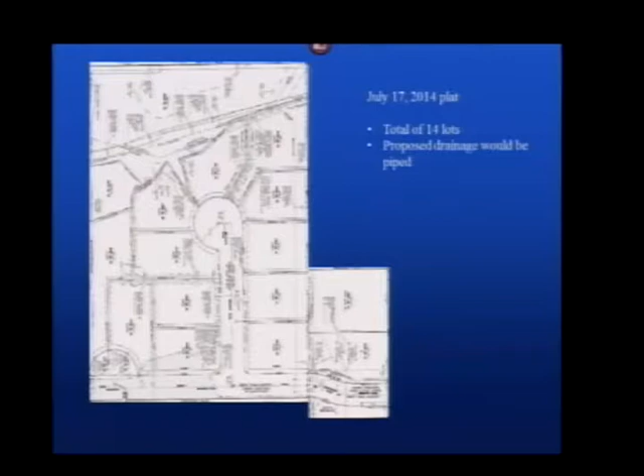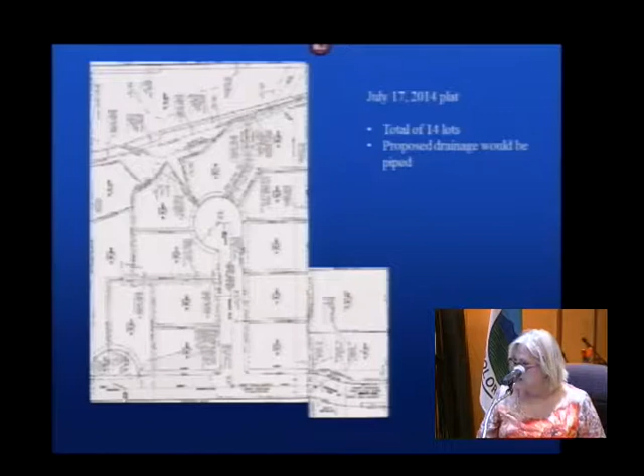This is the graphic portion of the plat that we looked at on July 17th. North is to the top, 33rd Avenue is down here across the south, and Quail Street is over on the eastern side. There were a total of 14 lots, and at that point, the drainage report and plan showed all of the proposed drainage to be piped.

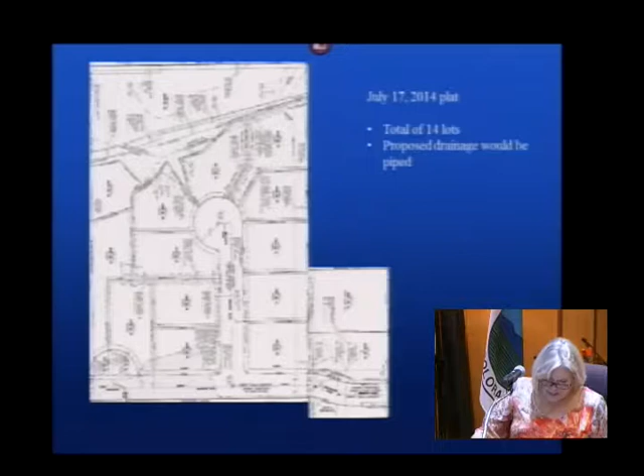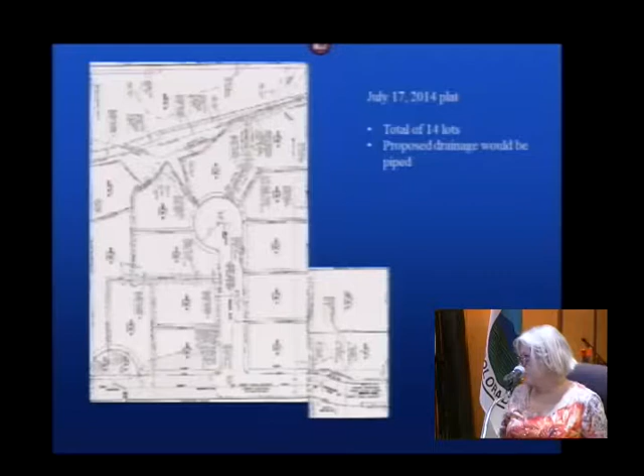The public hearing was continued until tonight, August 21st, and the applicant did receive approval of their nationwide permit on July 25th, which authorizes them to build the project in accordance with the modifications we're talking about tonight. So this is the old plan, and this is the new plan.

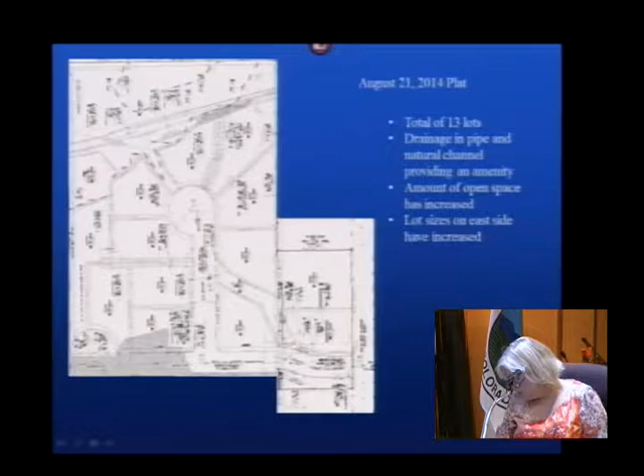Again, north is to the top, 33rd Avenue is down here at the bottom, Quail Street on the eastern perimeter. We still show 33rd coming in and extending west with a cul-de-sac bulb called Quail Court extending north. However, the plat and drainage system has been modified so that stormwater enters the site and runs in an open channel in a tract called Tract G at this location. When it hits the street, it is piped and then daylights again at the north portion of the cul-de-sac and runs into Lena Gulch.

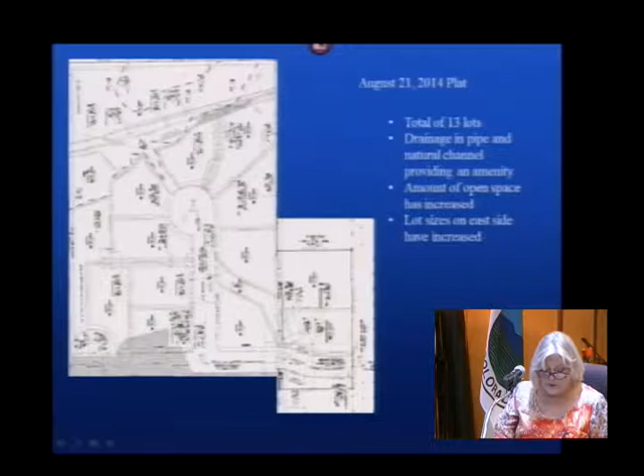Now the minor tributary called Quail Creek, which is part of the drainage situation on the site, still has to be accommodated on the property, so those flows are still going to be piped along the eastern edge of the property in a drainage easement.

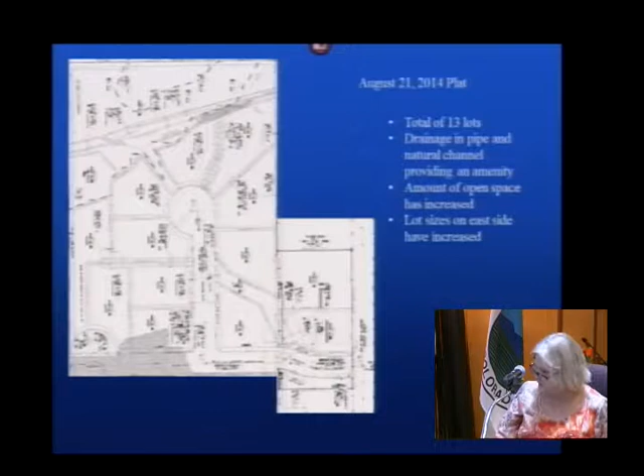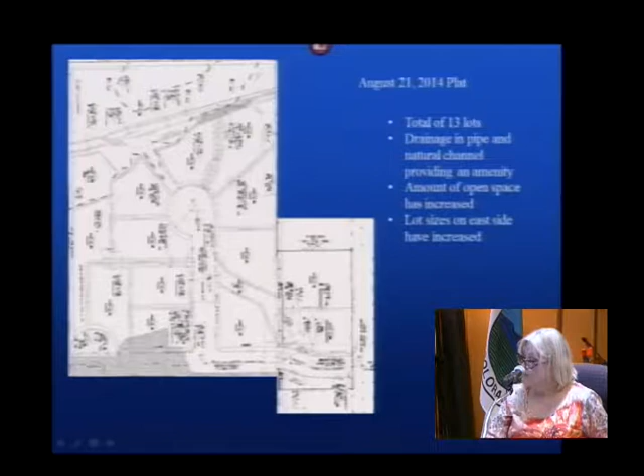The drainage design with the open channel in the southeastern portion affects primarily the lots on the east side of the cul-de-sac called Quail Court, and it actually reduces the number of lots from 6 down to 5. So essentially the first 3 lots, lots 1, 2, and 3, now are lots 1 and 2, with this conveyance that goes through. They've divvied up the property to accommodate that.

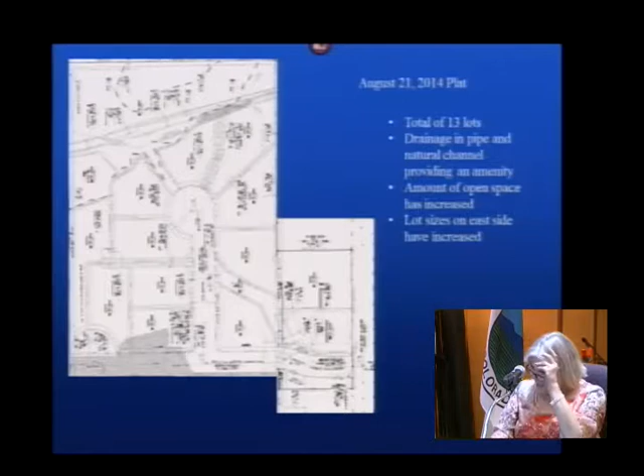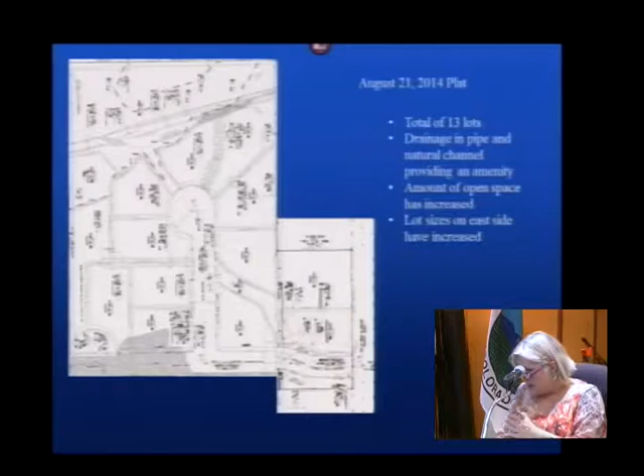The lots on the eastern side of Quail have been reconfigured. The lots on the western side of Quail Court are still the same, and the only difference is that they've been renumbered. So instead of 14 lots in the subdivision, we're now down to 13, and that's the same scenario for the 2 parcels over on Quail Street—same configuration, but also renumbered.

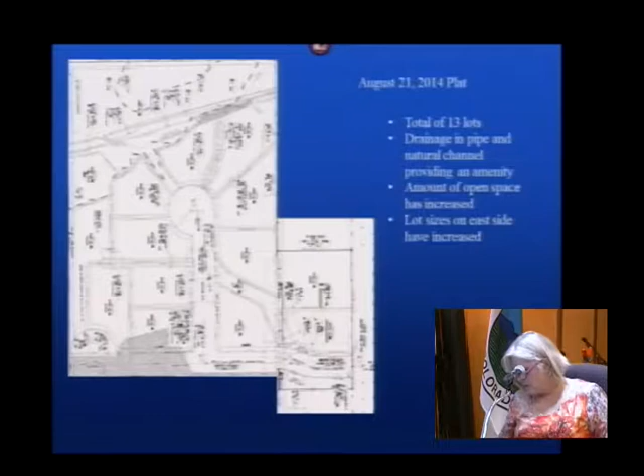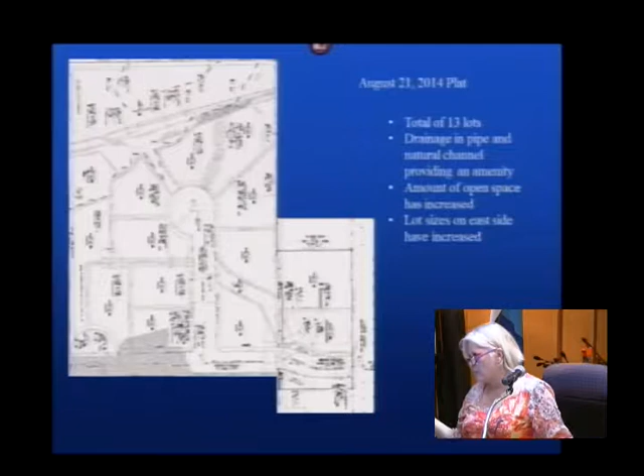Because of the open channel that extends from the cul-de-sac bulb up to the Lena Gulch area, Tract A, the whole floodplain piece with the actual gulch running through it, has increased in size by about 2,000 square feet. So we've got fewer lots, drainage in a pipe and natural channel, which we think will be an amenity for some of the lots. The amount of open space has increased, and the lot sizes on the east side of the subdivision have increased as well.

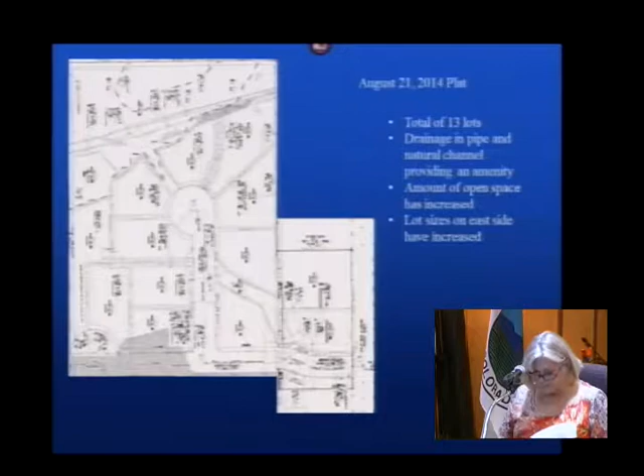There are a couple other items of concern that were brought up at the July 17th meeting. The first is the issue of flag lots. There was a lot of discussion about Lot 11, the westernmost lot, which has a large buildable area and then a long driveway, or pole piece, that connects to 33rd Avenue. We were asked whether alternate designs were considered.

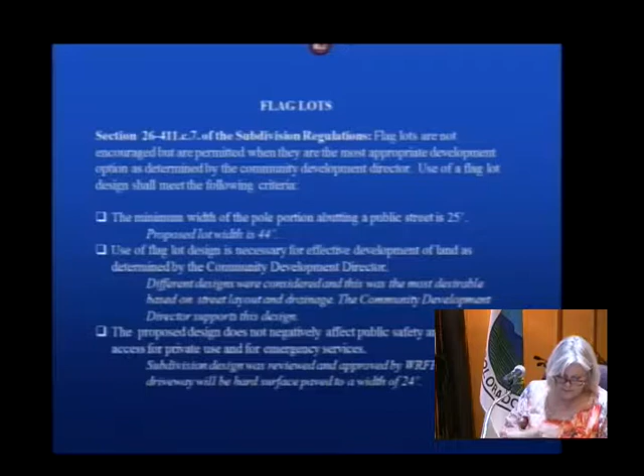Now, we do allow flag lots per the subdivision regulations. They are not always encouraged, but if used, there are 3 criteria. First, the minimum width of the pole portion abutting a public street is 25 feet, and in this case it is 44 feet in width. This figure does not reflect the cul-de-sac bulb—when you include the bulb, it's really more like 80 feet by the time you get the circumference of the bulb.

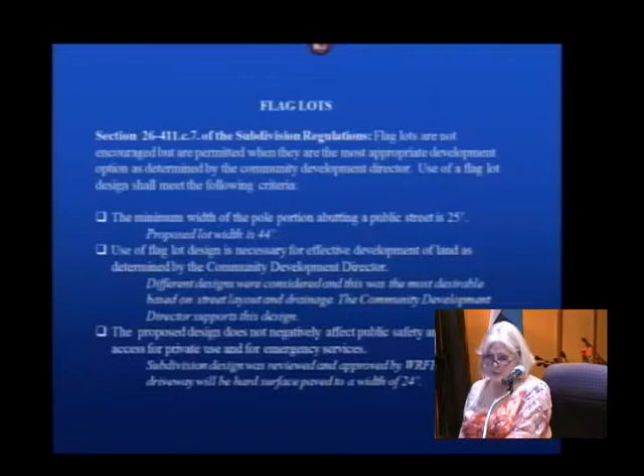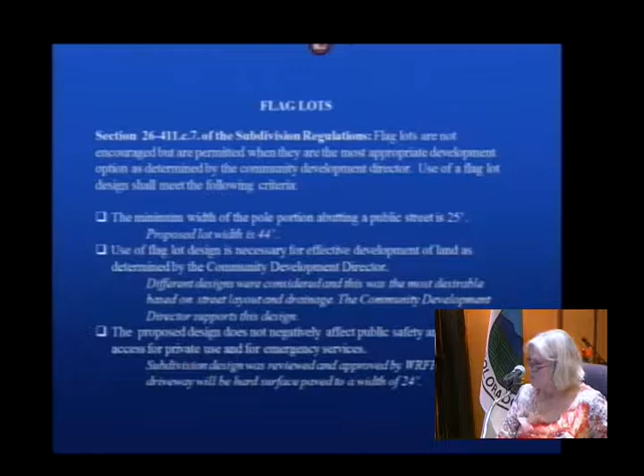The second criterion is that the use of the flag lot design is necessary for the effective development of land. As I indicated at the last hearing, we looked at different designs, and this was the one we considered most desirable based on street layout and drainage, and community development supports this design. Finally, the proposed design does not adversely affect public safety and provides access. The subdivision design was reviewed and approved by the Wheat Ridge Fire Protection District, and the driveway will have to meet standards with at least 24 feet of paving. I would note that Lot 11 is a little different than a lot of the flag lots we see.

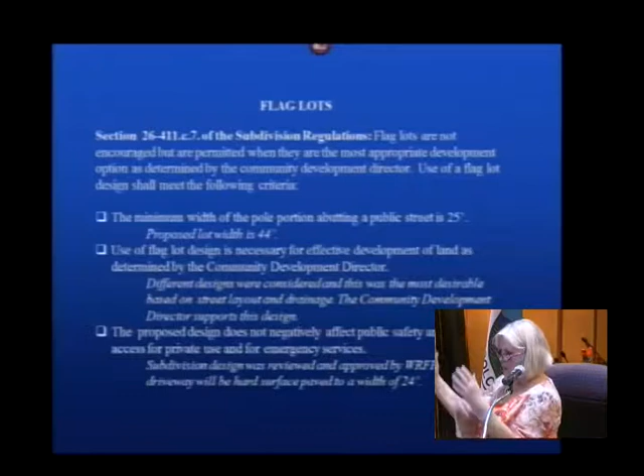A lot of times we see where you've got a piece of property with a house on the end, and then with kind of a big rear yard, and people want to subdivide off that rear piece to provide another dwelling unit site. This is a little bit different because it's specifically been designed, and it does exceed the R1 minimum standards and is over 20,000 square feet in size.

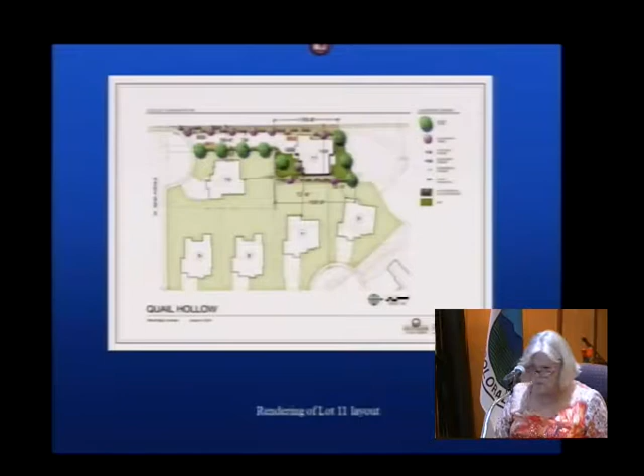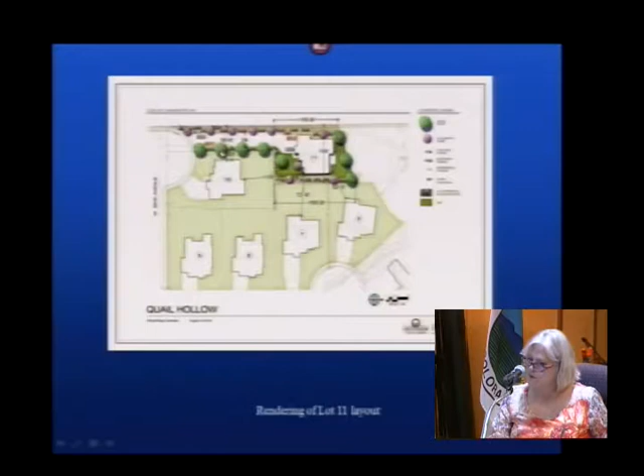The applicant did provide a couple renderings about what they anticipate construction on Lot 11 to look like. In this situation, north is over on the right-hand side. 33rd Avenue comes in with the temporary cul-de-sac bulb, and then the driveway extends north. This lot here, Lot 10, is set back quite a ways from this. I don't think it'll have the feeling of looking directly into their backyard. There's also some pretty nice buffering with this large side yard on Lot 10.

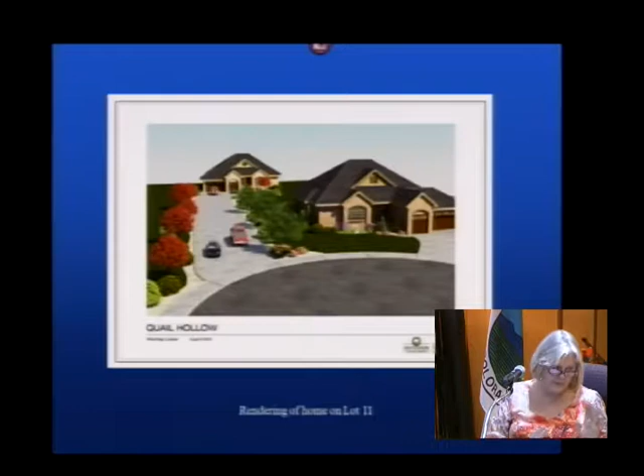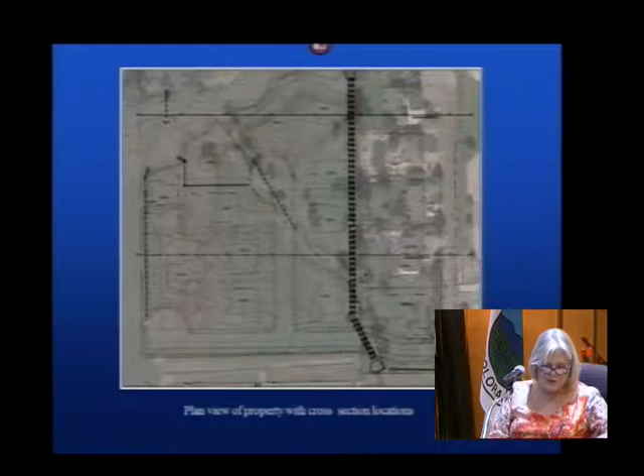So that's what they were thinking the lot layout might look like, and then this would be a rendering. They probably will be able to address that a little bit more about how they think that lot will develop. So the other question that came up with regard to the subdivision design was the issue of fill that was being put on the property.

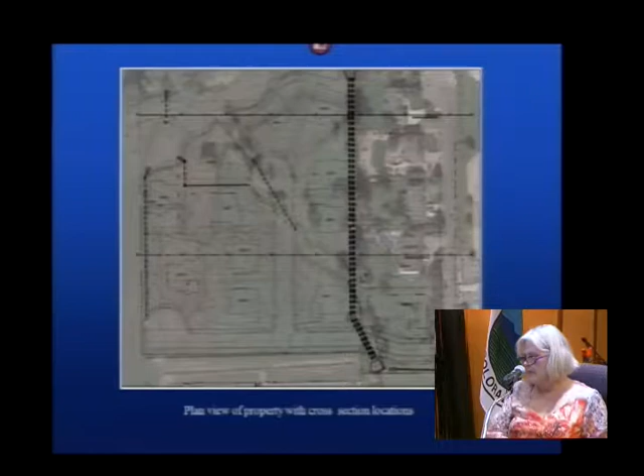The applicant had indicated there would be about 3 to 6 feet, depending on the location, less fill dirt down at the southwest corner and more up at the northwest corner.

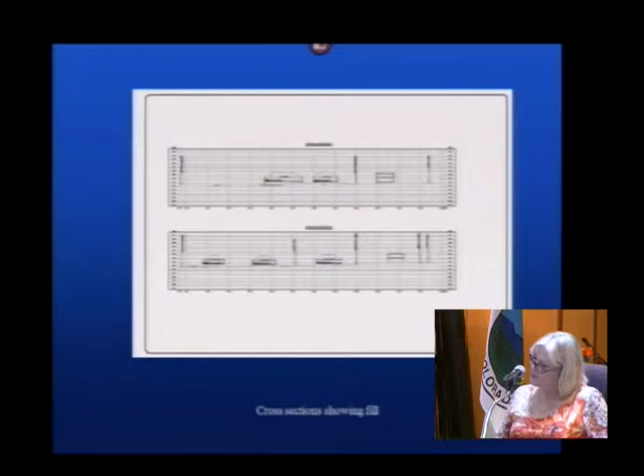So this is a plan view of the subdivision again. 33rd Avenue down here, north is to the top. This is Quail Court. They are showing 2 section lines where they have provided a section drawing, or cross-section, to show that fill area. One's further down on the south, and one's at the very northern end. And that drawing is here. I'll let them go into that a little bit more about how that potentially does or doesn't impact the adjacent properties in the area.

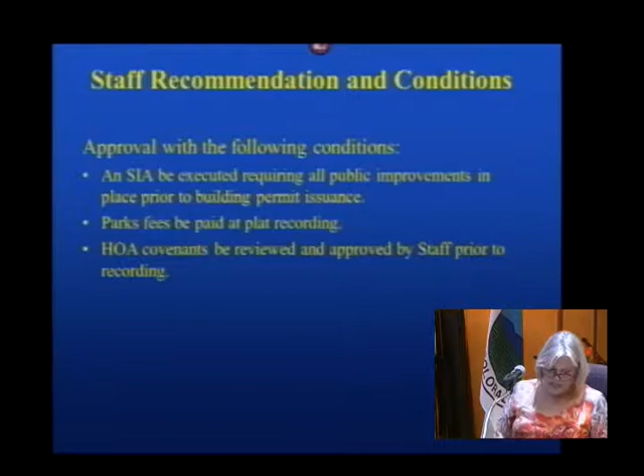Having said all that, staff has concluded that the revised subdivision plat is consistent with the approval by the Army Corps of Engineers. Staff further concludes that the plat is consistent with R1 zone district standards and all requirements of the subdivision regulations have been met. Therefore, we are giving a recommendation of approval with 3 conditions, and those are actually the 3 conditions that were on the suggested motion during the last hearing too. Those have not changed. And so that does end my presentation.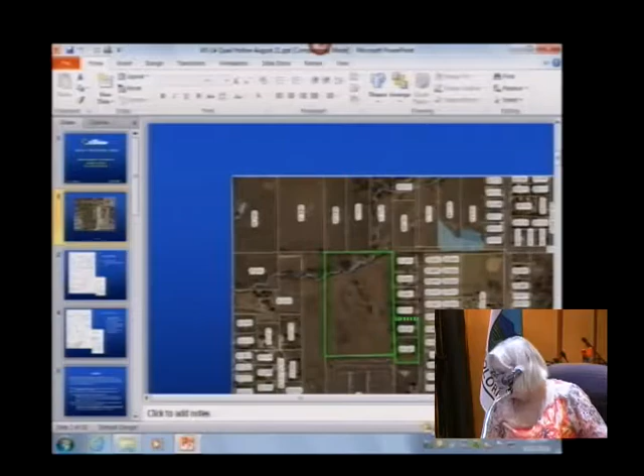I'd be happy to try to answer questions. Thank you. Starting from my left, Commissioner Buckman. Commissioner Weaver?

I've just got a lot of questions about the drainage because I am on the property just north of this. I can tell you from my experience, and I was just walking on the property that is north of Lot 12 on Quail, when it rains, it all drains down Quail in a river formation, and it's all open ditch on the right-hand side of the school. I'm having a really hard time, and being a receiver of Lena Gulch as well, I'm kind of shocked that those lots are so close to Lena Gulch, having seen the floods of the last year go through here and the amount of water. And that was with no development on here.

I'm concerned that this isn't going to be enough sort of drainage mitigation. And if it all is going into Lena Gulch, what's going to be the impact? Because Lena Gulch then goes down and makes a curve and sort of slams into 3 houses that are right there that stormwater has created a devoted channel to. What's the volume that's going to change off of that impervious surface going right in there? Because right now it's just going down into the farm and creates a river and goes into Lena Gulch, and it's all farmland, so it doesn't matter.

And so that's my second question - that's what we keep calling the tributary to Lena Gulch. It's called Quail Creek, and those are the waters the developer has to accommodate because it already comes onto the property, and they have to maintain historic flow. Those flows would be going into this pipe. I just want to make clear to everyone that it is not a temporary creek - it's a ditch with reeds growing around it, and it's a significant water feature, up to your knees.

So I guess, having experienced that, that's my concern. I think that's all I have for now, thanks.

Regarding Lena Gulch, with this proposed development and the grading plan, they're staying completely out of the 100-year floodplain elevation, so the development has no effect on Lena Gulch or its ability to carry or retain water. The flood elevations are determined by the urban drainage district, and the maps were just recently revised based on new modeling that accounts for full development along the whole gulch. So what this development contributes to Lena Gulch is a drop in the bucket compared to what's in the model.

Okay, but didn't you say that all of it's going out to Lena Gulch? Correct, all the stormwater. So you're saying there's going to be no change, essentially? No change as far as Lena Gulch is concerned.

But it's already a flooding situation - basically when it rains hard, it's coming down Quail Street. That's already a problem. Regarding Quail Street, based on comments from the last meeting, there's a lot of runoff that comes from the south, beyond this development, down Quail Street. This development will not contribute any more to that, but in fact they are picking up some of that water on Quail Street and diverting it through the development to Lena Gulch.

So that would be my concern for those four properties. Do you know where I'm talking about? Just north of this—up here, I guess you can't see me pointing at it. Do you see the right-hand turn it makes as it goes through the property and then goes basically north-south? That turn is an engineered area; storm drainage has engineered that huge wall of water quite well.

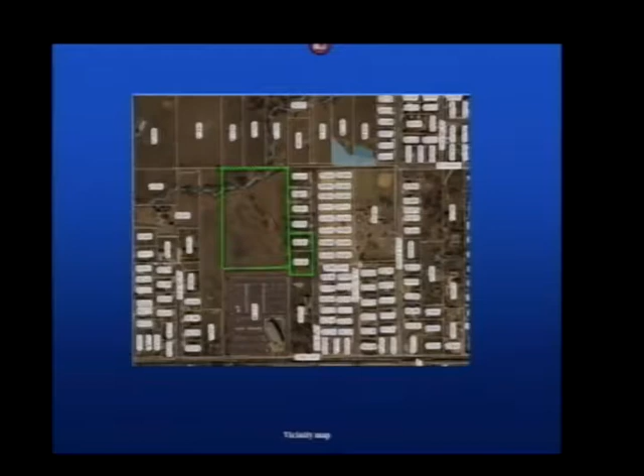Commissioner Dorsey, did you have anything else? No. Okay, Commissioner Timms? No questions for staff. Commissioner Pop?

My only part of that conversation is just acknowledging the volume. Ultimately, when you pave farmland, the water is going to flow a lot faster and it's not going to be absorbed. So while the amount of rainwater falling from the sky isn't going to change, the amount being absorbed by the ground is. So you're adding to that issue as well.

So my question is, if it turns out there are issues in the end, what are the options? Is the city stuck with the problem? Is there anything we can do to go back to the engineers? How would we fix it if there is a problem?

That's a good question. Scott, do you have any thoughts on that? Maybe you have to define what the problem would be. I'm having trouble understanding what kind of problem we're talking about. Lena Gulch has a 100-year flood elevation established, predicted by a model. That doesn't mean it couldn't be exceeded, if something happened like what happened in Boulder, for example. I'm not sure what we would do about something like that.

But as far as the water getting conveyed to the creek through this new development, it's going to be carried two different ways. One is through the channel that's already being preserved. The other is through two larger pipes that will convey most of the larger, heavy volumes of water. When it reaches the gulch—maybe in the developer's engineer's presentation he could explain—at the outlet there's a riprap system, maybe even an energy dissipation system, that slows the water down a little more before it gets to the gulch and helps with erosion control.

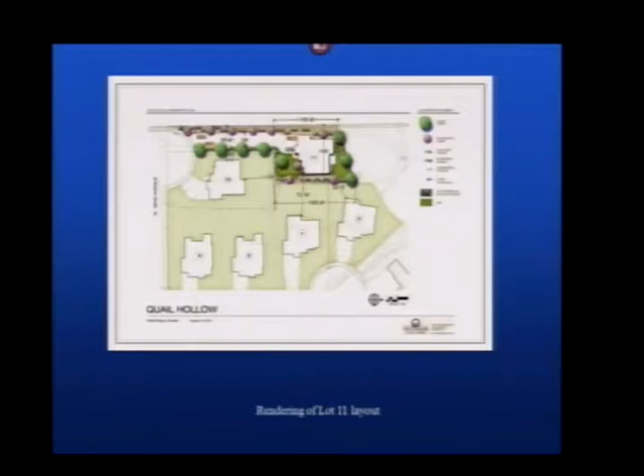Well, again, you know, this is a rendering, not an exact building location. Lot 5 has gotten significantly larger. So it could move, the house could move over? Yeah, I mean, okay, let's go back.

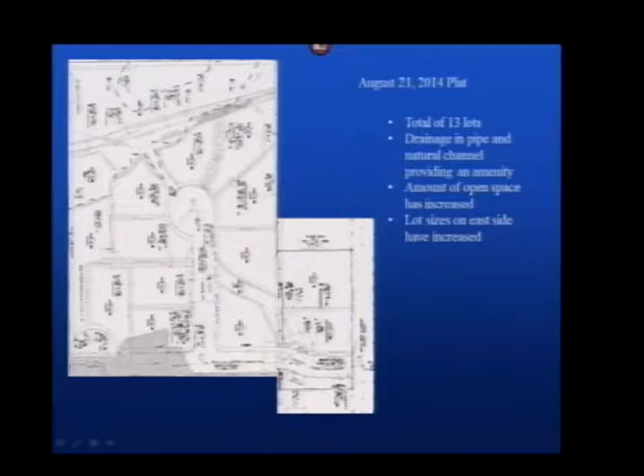To that A, okay, I'll follow up with the applicant. Thank you, I just wanted to see if the staff had any comments on it. Sure. Okay, before we go to the applicant, is there anybody?

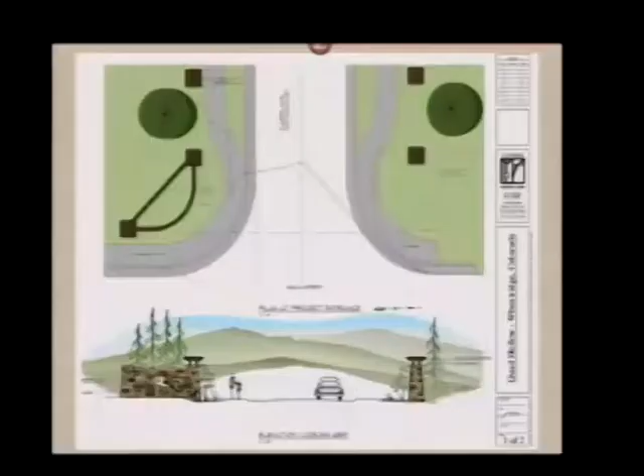We have a monument out in front with these brick columns with woodwork on the top, which will help lead down into the street. We have the street meandering somewhat to give it a little bit of character. These homes here are ones we've built in another location, but it'll be the exact same homes. So you can tell they have tile roofs, stone and stucco, nice pitches on the roof, so it has that European feel. No siding on them, and we have quite a bit of clip roofs and hip roofs going on them.

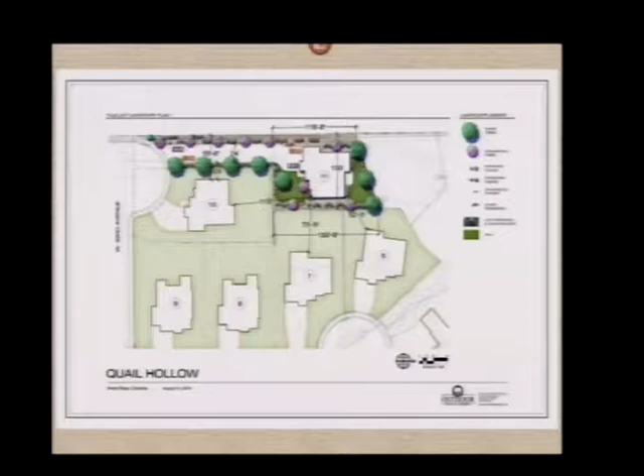This is a street that they're on. This exhibit, Meredith, I think, did a good job. As she pointed out, the flag lot is 43 3/4 feet wide. We've got approval from the fire department, and there's 59 feet from the closest house to the property line. This elevation, which she showed you already, if you'll notice, the driveway itself is 24 feet wide. We met with the fire department and got their approval on this home and this flag lot.

And the sections, I'd like to spend a minute just on these sections. We'll talk about this section here first, and then this section here. The next exhibit shows this. What we've done, this is one of the 4 houses where this section goes through.

It butts up to 33rd and Quail. These are the new houses that we're going to be building here. One thing I want to point out, if any homeowners are here this evening, is that wherever the property lines meet, we're not changing that dimension one inch. It's going to blend in perfectly with the back of their yards.

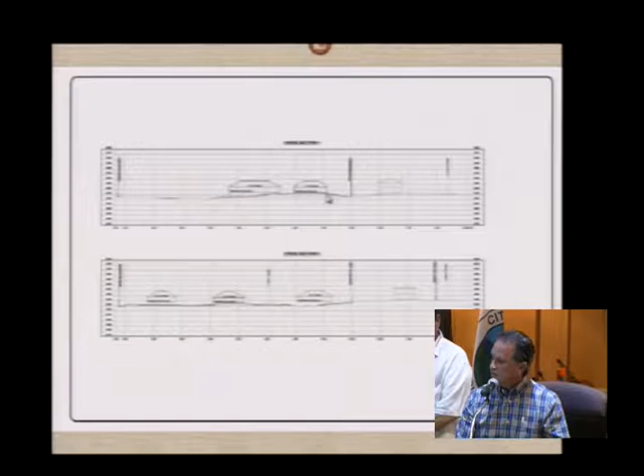Where the house is, on average the calculations were done by our civil engineer, and on average we're raising the site 3 feet in general, some being lower, some being higher. This lower section here was at the bottom of that section.

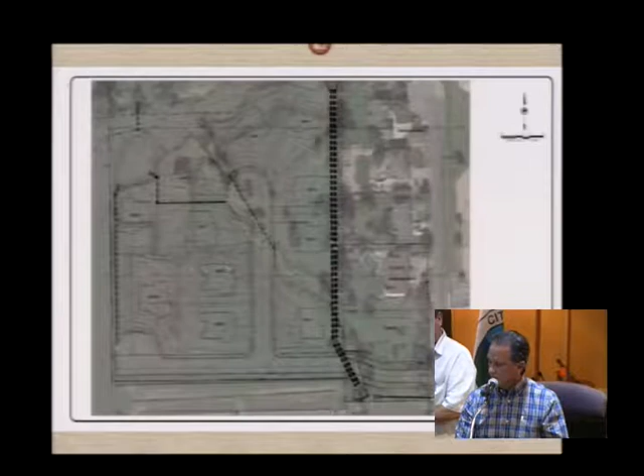This next exhibit is this section that's going right through here, this house and these other lots that we have. You can see that the amount of dirt we're bringing in isn't going to create a mountain or a hill. In fact, our houses are going to be shorter and lower than the houses along the abutting street.

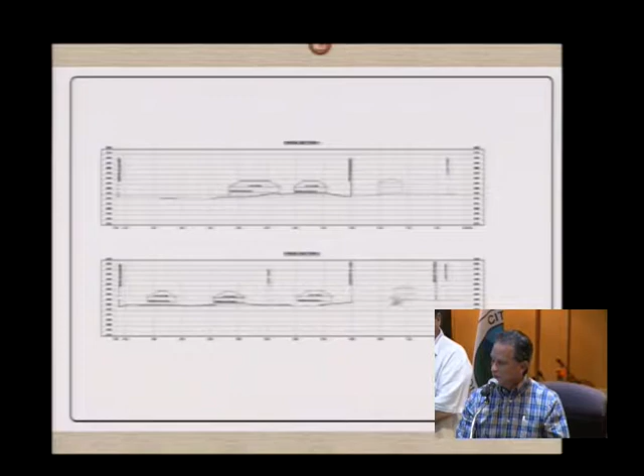So the neighbors would like to know that. And this is the Corps of Engineer letter. That just about does it. I think Mark from Jehn Engineering can talk more in depth about the drainage.

I'll give you my input. I've been told that the drainage report and all the calculations have been done, which took quite a bit of time. We heard last time that there's quite a bit of water coming in along down this street here. Our understanding is we're widening this catch basin up here, so the volume of water coming down here from us developing our property will be less into the future.

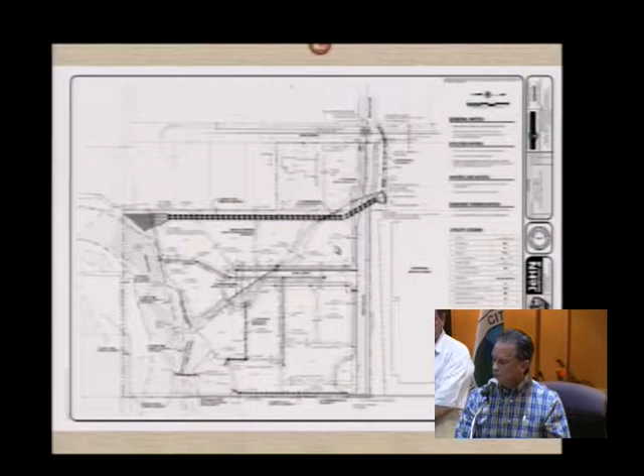Knowing that we only have 25% coverage on the lot, and these lots far exceed the 12,500 minimum, in fact our smallest lot is 14,900 and change, and our biggest lots, I think there's 4 or 5, are in the 22,000 square foot dimension. So with only 25% coverage, I think there's quite a bit of pervious property there as well.

And I'll let Mark speak to that from Jehn Engineering. Or should I take your questions now, or should we turn it over to Mark? Why don't you both speak, and then both thank you. Should I stand there? How's that?

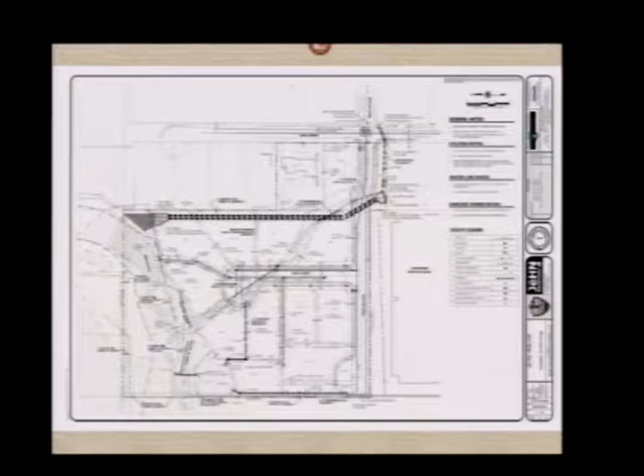Thank you. Mark Bishop, B-I-S-H-O-P. I live at 3645 Lewis Street, Wheat Ridge. I'm here for Jehn Engineering, and I guess I'll just start right in on the drainage here, as the concept, if you will.

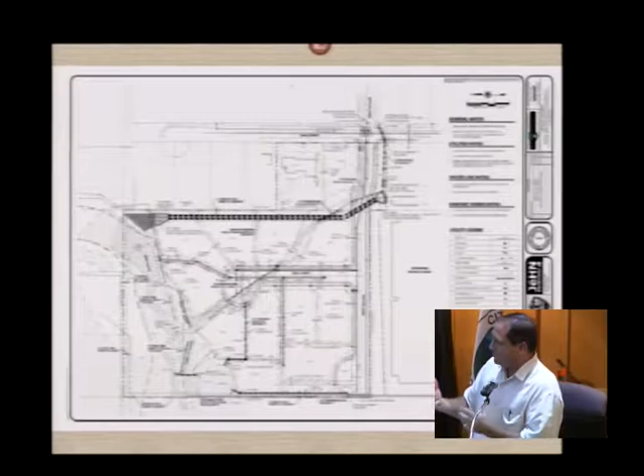As you said, this tributary feels like an irrigation ditch because it's always running with water. One of the things we had to prove to the Corps is that we would maintain the ability of that water to sustain the wetlands we're leaving there. So at the beginning of this pipe system, that water comes down into a basin here, and there's a diversion structure at the beginning of this. It takes all that low flow, all that continuous flow, into an inlet here, and then that comes through across this small pipe, feeds into the channel. Another small pipe comes back, feeds into the channel, another small pipe, and then it comes out here.

So to address the concern down at this end, what's happened is we've diverted almost all the water that will hit that, in essence whatever falls directly on this place, or whatever that diversion structure can take, which is the low flow, the base flow water that will come through the existing channel and out. All other waters will come back through and go out here, and get into a dissipating structure that will slow the flows down and introduce them in an orderly, low velocity fashion into Lena Gulch.

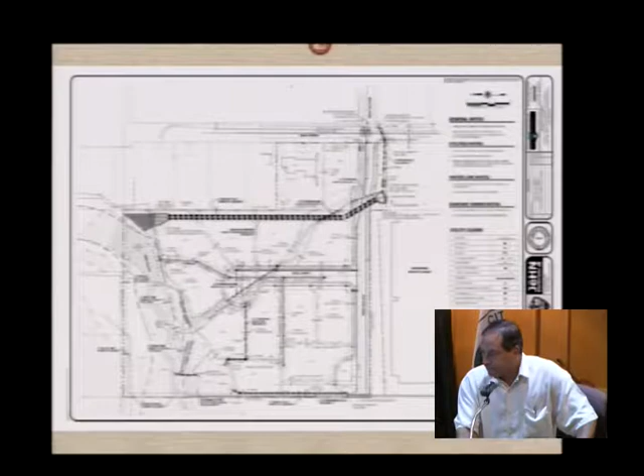So unless you have any other questions, I'm more than happy to clarify more, but that's where we're at right now.

Thank you. So we'll start on my right this time. Commissioner Ohm? Would I be correct that Tract A would be revegetated? Tract A will remain natural, undisturbed. And then what is Tract B's purpose?

Tract B? I think that's the water quality pond, if I can't quite read it on the screen. So what water is it treating, I guess? It is treating the water out of the streets. So it treats the low flow out of the streets. Okay, thank you.

Commissioner Pop? I don't have any questions. Thank you. Commissioner Timms? No questions at this time. Thank you. Commissioner Dorsey? I have no questions.

Thank you. Commissioner Weaver? Yes, I have questions. Just so you know, I think the drainage plan you have done seems fine to me. What I'm concerned about, and what I want to present to everyone here, is have you talked to Consolidated about their discharges? Because Consolidated controls the amount of water coming through Lena Gulch, and having lived on this gulch now for 4 years, I have experienced 3 to 4 times 100-year flood levels down this gulch.

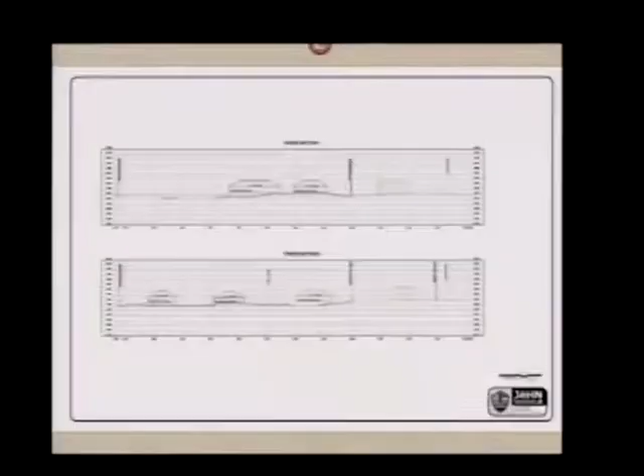The ditch, is it going to be an open water ditch or is it going to be piped? Does it go under or over 33rd? Right, yep. I'll let the engineer speak to that. Thank you.

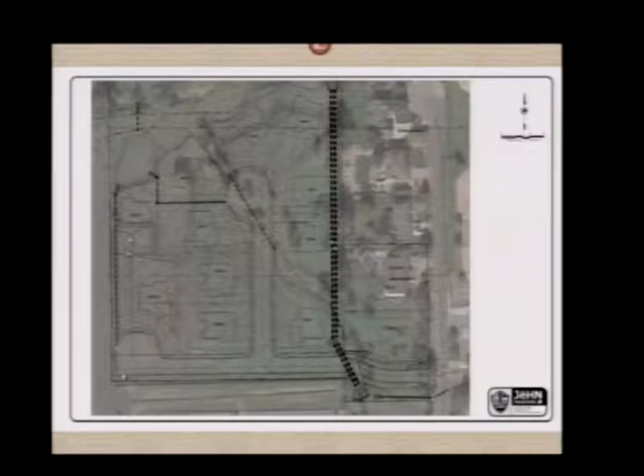Yes, if you look on the west side here where the concern is, what we have is a pipe that goes from an inlet collecting water from the road, conveyed north and up into this water quality pond. There is a ditch being constructed along the west edge of the driveway that goes back to lot 11 and along the west side of that lot into the water quality pond.

I want to address the purpose of that ditch. It's there solely, and sized solely, for the purpose of: A, if this inlet gets clogged and can't convey the flows, it doesn't flow onto her property. And B, we were required -- the church here has a detention pond. If their inlet or outlet gets clogged, they have an emergency spillway that sits here, which would enter onto the street and then be conveyed down that swale. That swale was designed to take the combination of both flows should that unforeseen circumstance happen.

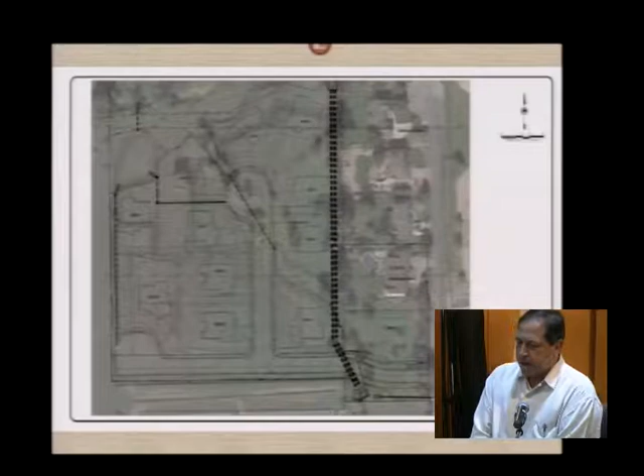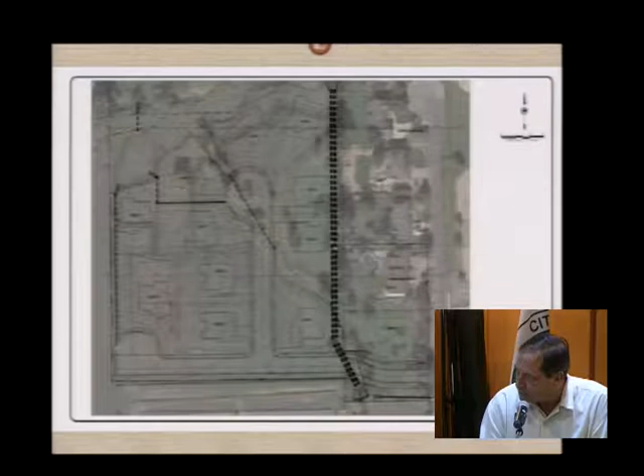Thank you. And then there was a comment about a 3-foot high concrete wall. There's a 3-foot high concrete wall along the side of the driveway, primarily to make sure that ditch works, but it's not 3 feet high all the way along it. I would like to go back to the cross sections.

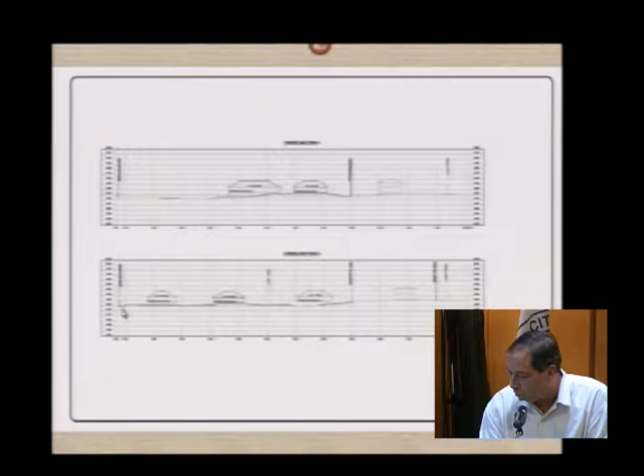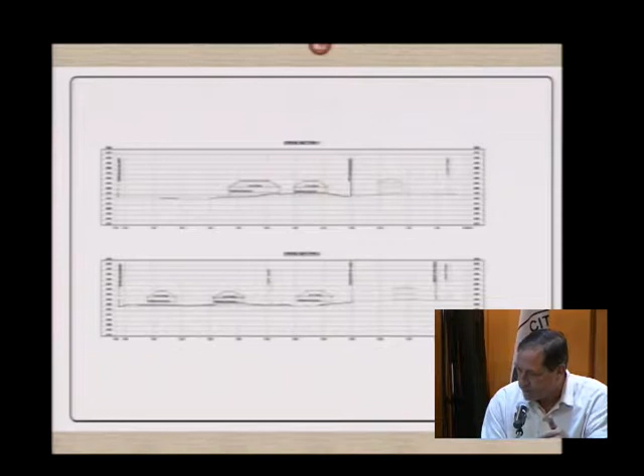Here, as you can see, by the time we get to the north side, there is no wall. The wall actually ends just at about the foundation of lot 11. So on the total north side of the project there is no wall, and there's a small wall, like in this cross section, about 1.5 feet. It goes from zero, about 10 to 20 feet from the roadway, then up to a 3-foot max, and then comes back down.

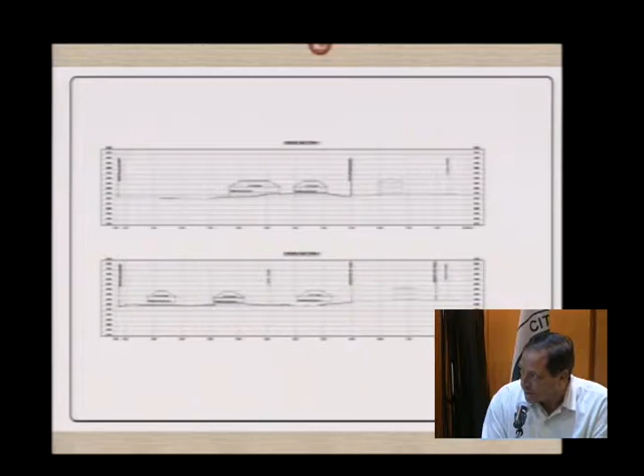I'll let Bill address this, but another point we haven't made is maintenance on this project. They are patio homes, and they will be maintained. The entire project landscaping is maintained by the homeowners association.

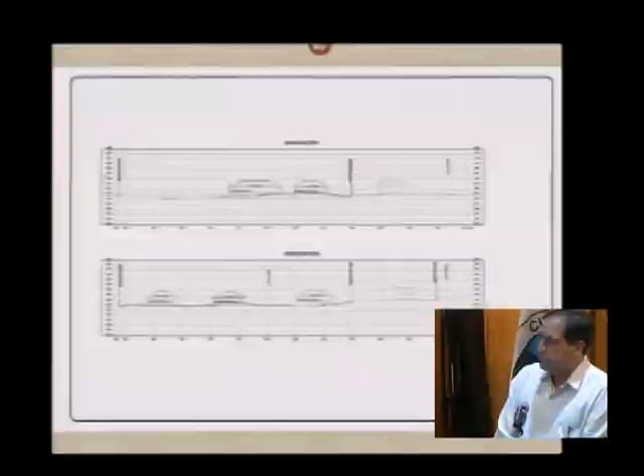Okay. So just to repeat, the concrete wall daylights and flattens out, but it's there to ensure the swale maintains its structure. That's correct, and I doubt it will be concrete -- I'll bet it'll be some kind of modular block. But it won't be an unattractive wall. Okay. What else am I missing? Did I catch them all?

Go ahead, just a quick question. I'm looking at staff's Exhibit 6, the cross-section locations -- I think it's something you guys submitted. There's some contours in there, an overlay on an aerial photograph with contours along with the lot lines. I was wondering if offhand you knew what the contour interval was, just to get some sense of scale. Probably a foot. A foot? Okay, thank you.

I have one question pertaining to the flag lot and the 24-foot wide driveway. Typically for long driveways, I see an average width of about 15 feet. My understanding is that the width here is 44 feet. 43 and 3/4 feet, yes, sir.

Okay, and then we subtract the 24-foot driveway, so we're left with, I'll guess, 10 feet on either side? I believe it to be 9 feet on either side for landscaping. And of that 9 feet, we're going to have a 1-foot concrete wall, and then how big is that swale?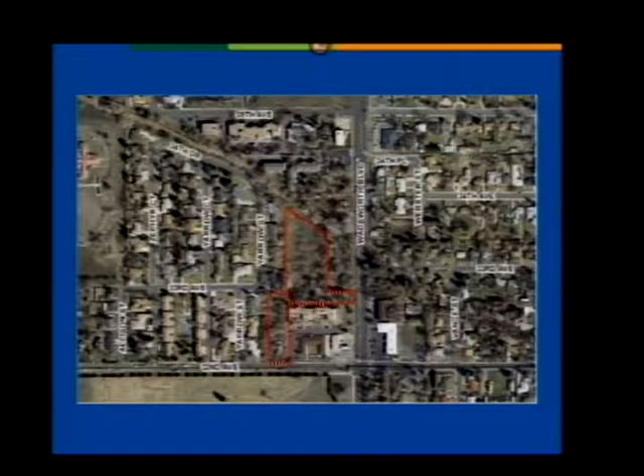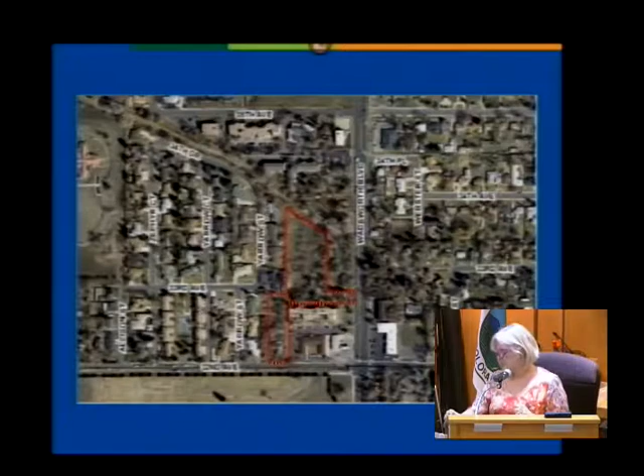So again, we are revisiting a case that Planning Commission reviewed earlier, specifically on June 19th, 2014, and recommended approval. Subsequent to that hearing, but prior to City Council, the applicant realized that several of the proposed parcels could not accommodate some of the proposed models due to the maximum building coverage shown on the ODP that you all recommended approval of, 40%. The applicant is requesting that maximum be reconsidered to better accommodate the proposed development, and we decided it needed to go back to Planning Commission for your input.

So this is the property in question, outlined in red. 32nd Avenue runs along the south side, with Wadsworth over here on the east. And just a little bit of information.

The application is for approval of a planned residential development, and the city's planned development process includes two steps. The first is for the zone change and approval of the outline development plan, or ODP. The ODP document, which is the big pieces of paper you have, establishes permitted uses and development standards for the property, and it also contains a general layout of the property—areas of landscaping proposed, parking, building footprints, and so on. The development standards required to be included on the ODP document include a list of permitted land uses, minimum lot size, minimum perimeter setbacks, maximum building height, and maximum lot coverage.

And so that is why we are revisiting this particular approval, to take a look at that maximum building coverage being proposed.

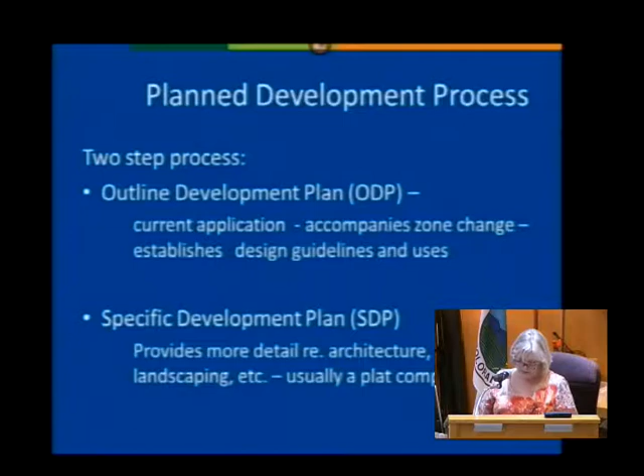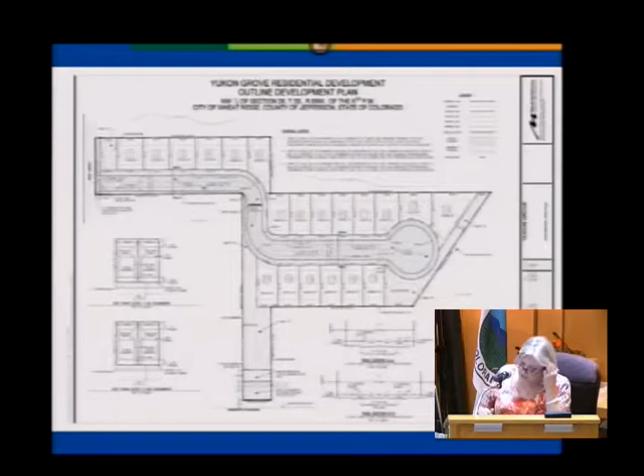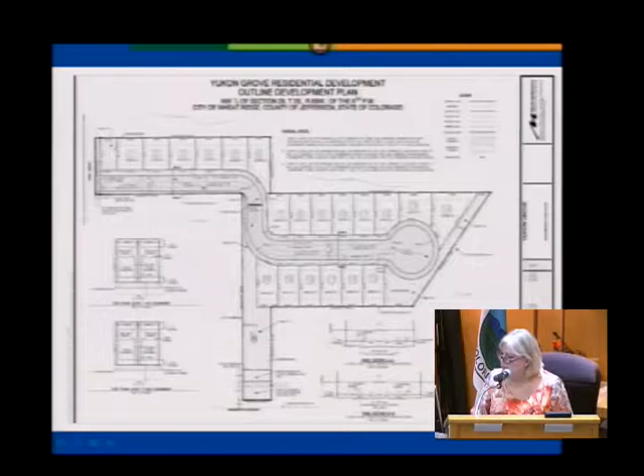So this is the second sheet of the original ODP document that you saw on June 19th. There have been no changes to this sheet. We're still showing the cul-de-sac entering in off 32nd Avenue and then extending to the north into a cul-de-sac bulb. The detention areas are still the same—one located in this location, one up here at the north, and then some other fire access, water line access, and another small detention pond in the flag piece that extends out to Wadsworth.

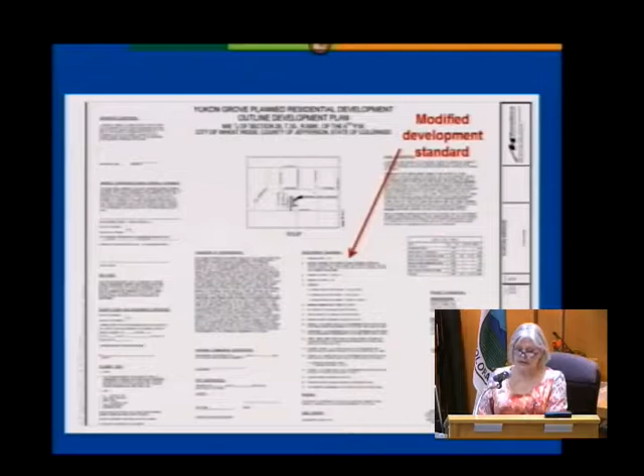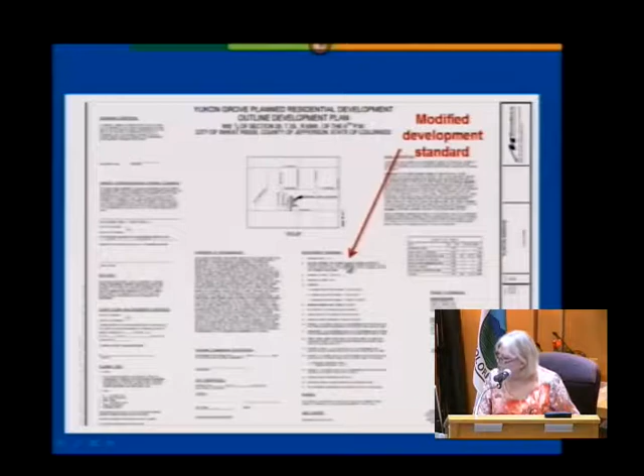This is the revised first sheet of the new outline development plan we're looking at. Everything is the same except for note number 2. I don't have the exact language in front of me, but they talk about an average on the overall development with maximum building coverage not to exceed 46.5%.

With regard to the two versions, the one you looked at on June 19th and the one we're looking at tonight, August 21st, I've tried to list what's the same and what's different. The number of lots is shown as 20 on both, unchanged. Minimum lot area is 3,500 square feet with 45 feet of lot width on both, unchanged. Building height remains a maximum of 35 feet. Setbacks remain the same: 10-foot front, 5-foot side, and 15-foot rear.

The building coverage is the one item we're looking at. Currently, on the June 19th version, there was a maximum of 40% for all models. In this revision, pursuant to note 2 on the front sheet, they're suggesting 46.5%.

When we looked at it, we tried to think a bit more critically. The two-story models are not the problem; we think those should remain at 40%. It's the single stories where they're trying to accommodate what's expected by contemporary home buyers, and they probably need a little more square footage. We're suggesting that note number 2 be modified to be consistent with staff's note here: 50% for a single-story unit, 40% for a two-story unit.

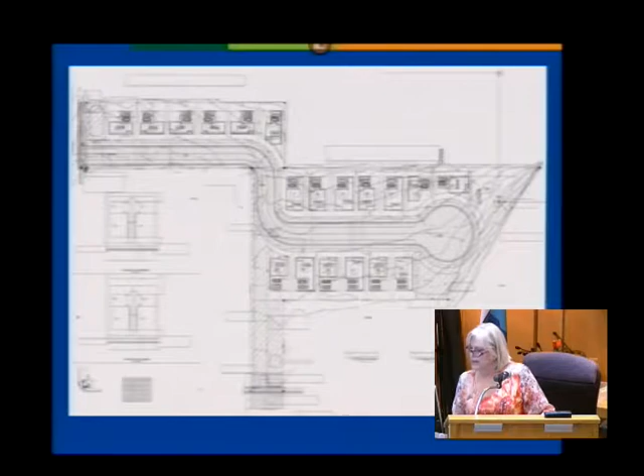The applicant did provide an exhibit where all the lots are laid out with home model templates identified to illustrate where the increased building coverage would apply. They also provided a chart relating back to the map included in your packet, which shows the theoretical layout of which types of models would be located on which lots.

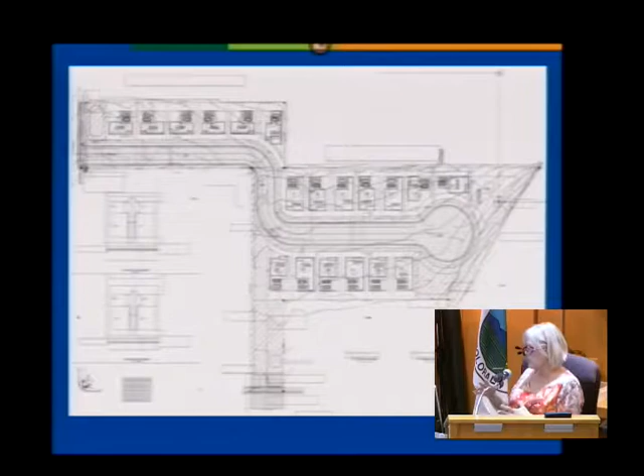According to the analysis they provided, the lots which need an increase in lot coverage would be the single-story ranch homes, or Model A, shown on the plan. Based on their analysis of square footage and footprints, they're looking at up to a 46.45% total maximum. We'd like a little more wiggle room in case something changes, so we're suggesting that percentage be increased to 50%, but just for single-story models.

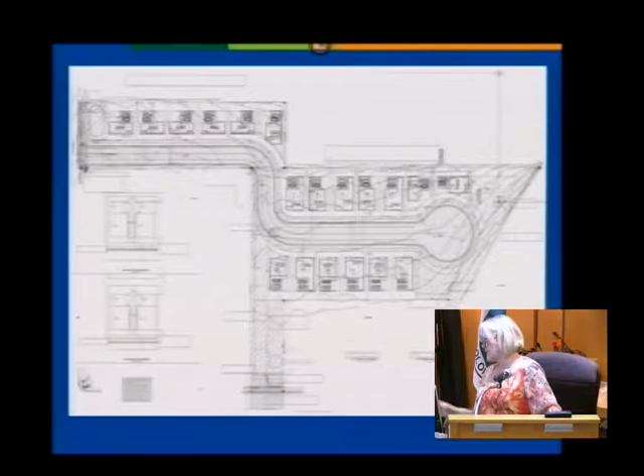We've considered the potential impact on the development and surrounding neighborhood, and concluded that the proposed single-story models will complement and be consistent with the single-family homes to the west. We think it might also provide an incentive for additional single-story models to be built.

So we are giving a recommendation of approval. We've concluded that the proposed PRD development and outline development plan are consistent with the goals and policies of the city's guiding documents, including the Wadsworth Sub-Area Plan, the Neighborhood Revitalization Strategy, and Envision Wheat Ridge. We further conclude that the proposed zoning and density provides a logical land use transition between Wadsworth and the surrounding higher density developments and the neighborhood to the west.

With regard to the increase in building coverage, we've concluded that the increased coverage for single-story models should not be detectable and could encourage construction of more ranch-style models, complementing the neighborhood to the west. We are giving a recommendation of approval, with 4 conditions added to the motion. The first 3, covering additional architecture at SDP, the schematic detail, and the tree-friendly plan, were taken directly from Planning Commission's motion on June 19th.

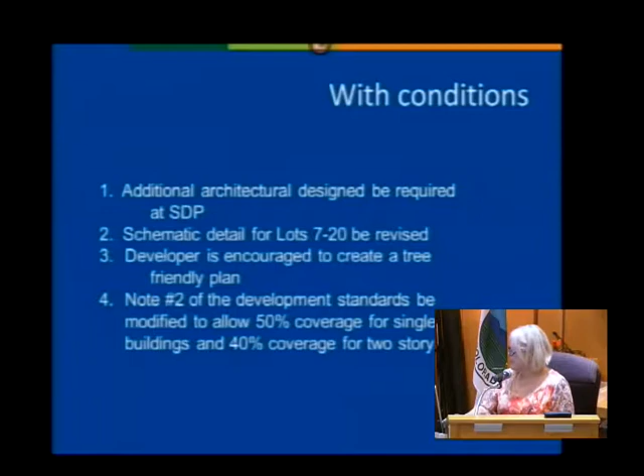We have added a 4th condition, that note number 2 on the front page of the ODP be modified to allow 50% coverage for single-story buildings. That is my presentation, and if you have questions, I will try to answer them.

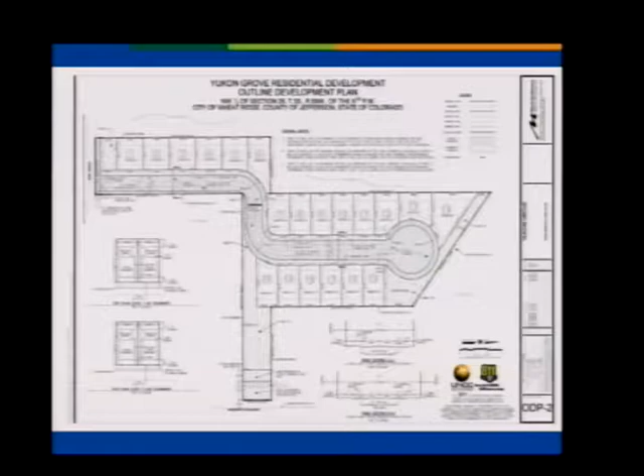So my question was, I'm counting 6 Model A's. Correct. Would you be willing to limit it to 6? Well, I would like to limit it to, say, 8, just in case we can get some on other lots, because that's what the community has been calling me about, saying we want a ranch, we want a ranch. But you'd be willing to limit it to 8? Yes, I mean, I'd like to limit it to 20 but I can't. I realize that, that's my concern. So limiting it to 8 would be fine. Okay, alright, thank you.

If we went to 8, limited it to 8, where would those extra 2 be placed on the plan?

Right now that's kind of a tough one to answer because of another situation we're dealing with. On lots 7 to 14, right between that and the property to the west, there's a 5.5-foot gap that doesn't belong to anybody, and the planning department doesn't want to have a gap back there. So we're trying to figure out how to incorporate that.